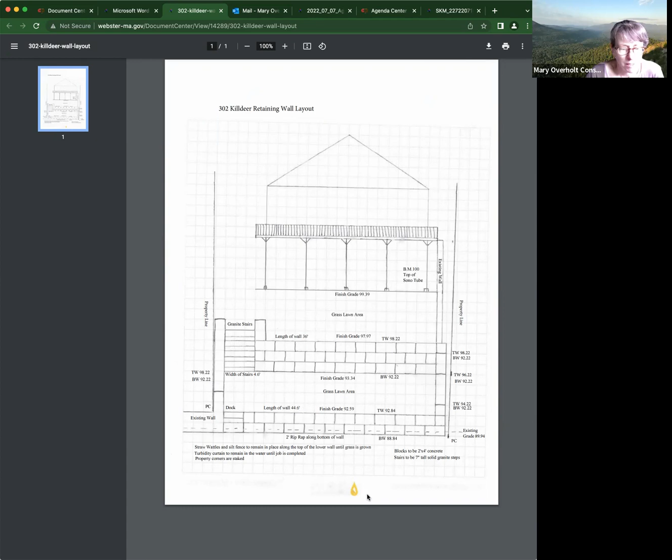All right, so if I remember from last time, the work at the water - the wall at the water - is done, with the exception of the riprap, correct? No, the riprap was in as well. Okay, okay. And then everything else was dirt. There was no wall on either side. And then the second retaining wall and the stairs were not in.

So, all right, where are you at with putting in that secondary wall now, Jared? We're about 90% complete. To the left there, going towards the stairs, we probably have two more blocks to set on the base to finish that, but we need to install the other retaining wall on the property line first before we can continue that wall. That wall is done - the other property line, on the left by the staircase - so to make sure that the integrity is there. And then we can finish the other retaining wall along the deck area and then complete the stairs and work our way out of the backyard. Okay, all right.

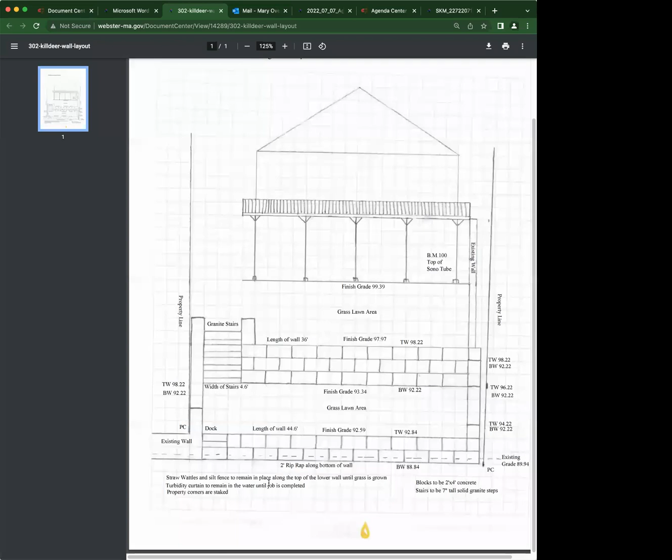We wanted to make sure that the turbidity curtain was pulled back out into the water. Was that done? Yes. Cameron sent me a text message later that day and told me that he had done it.

I understand the grades, I understand the retaining wall. The only thing I would say, maybe it's a little late, is I don't see any plantings whatsoever. Are there supposed to be? I don't believe so with this project.

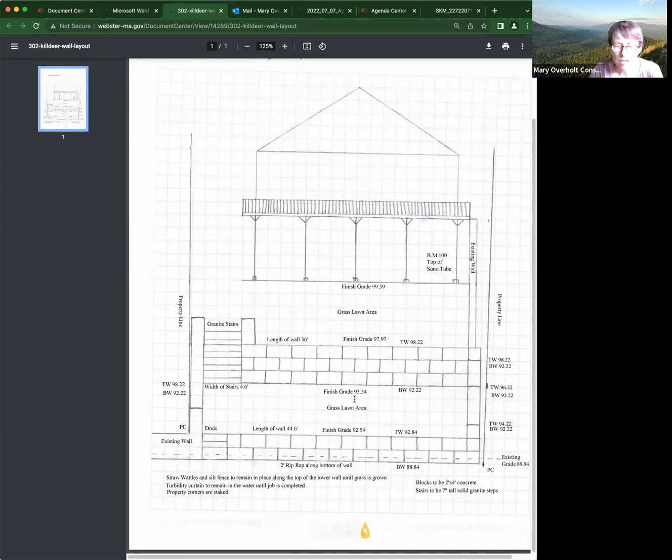Let me look at the order. Originally on the slope, we were supposed to, yeah, had requested some plantings. Oh, that's, you're right. But I now think that the whole lawn area was supposed to be planted, the whole bottom lawn. Okay.

Are you planning on putting in any kind of flowers or any kind of plantings at all, Cameron? Yes, we absolutely are doing plantings at the top along with the fence, for both safety and erosion. Down at the bottom, I think we're waiting to see how wide that space will actually be once the blocks come out, but happy to put something along the water's edge there, knowing that we'll have that lip, and that will go all the way.

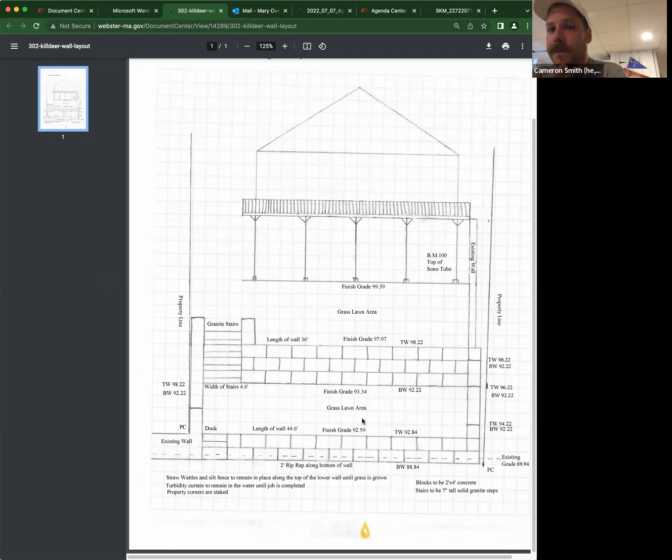So I know you had given us a couple different recommendations, and we can see what works and what will stay there. As part of this amendment, this is the big piece, but can you at least take this drawing and mark up a planting plan for us and get it to us?

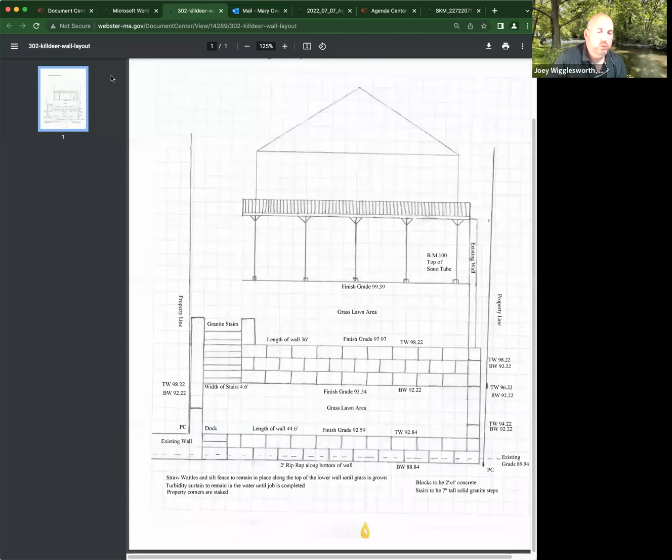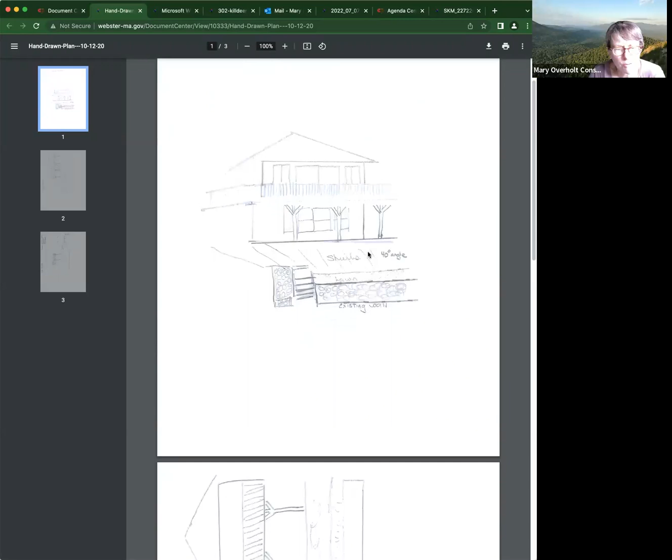Sure. Anything as far as recommendation, does it need to be basically the entire length, or is it more? We request natives, primarily natives. Okay, I think, what was in the other one? There was gonna be shrubs. Some shrubs, and was it ground cover that was called out in the order, Mary?

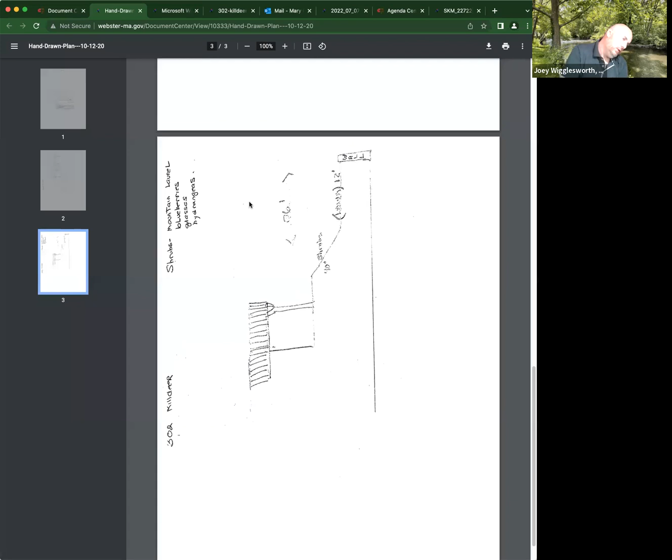Yeah, there were blueberries, hydrangeas, mountain laurels, but you could probably, maybe down towards the water, maybe in the corners or something, maybe put some, like some blueberry. I know you've got your daughter there. Some high bush or low bush blueberries, she might have some fun picking the blueberries off of it.

Jared had some suggested berries in there. Sure, we can definitely look at the two corners then for some sort of blueberry plant, just to kind of add some vegetation back in there for wildlife and whatnot. I know that changing this here, you've got a wall in there now where before it used to be just a big slope.

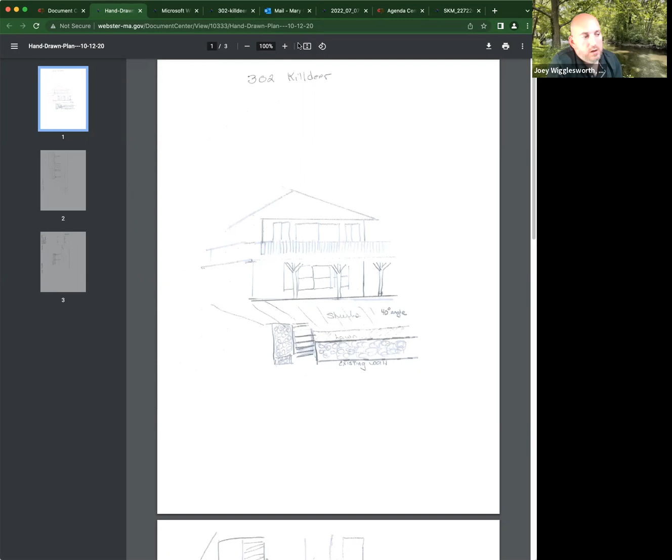But adding a bit of vegetation back in here would be good, maybe some black-eyed Susans somewhere, some flowers. You can talk it over with the family and find some areas in here, then just update your planting plan and get that to us. We don't need to figure that out tonight. Sure, yeah, my mother-in-law has a green thumb, so I'm sure she'll have ideas already.

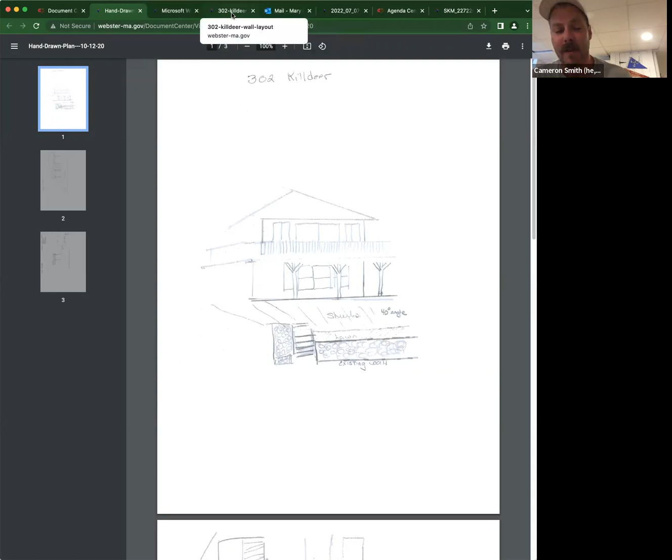All right, but as far as the critical part of this, commissioners, any other, we've got the phasing here. Turbidity curtain, the straw wattles to be constructed. Jared, you did a great job of phasing this out. Thank you very much. You're welcome.

I didn't see the first, the big wall against the patio in the phasing. Is it just because it's mostly done? Yeah, that's correct. I left it out and then I updated it again with what we have here, just the remaining few blocks we have to do on phase 5. I updated it without it because it was mostly completed. Okay, okay.

Out of curiosity, Jared, do you have an idea as to when the project might be at least all tightened up, buttoned up, and maybe done? I'm hoping by the end of not next week, but the following week. Okay, as long as everything goes as planned and weather cooperates. Well, I think we dodged a big one today, we could have gotten some pretty bad thunderstorms. Yeah, I think so. Next few days should be pretty good.